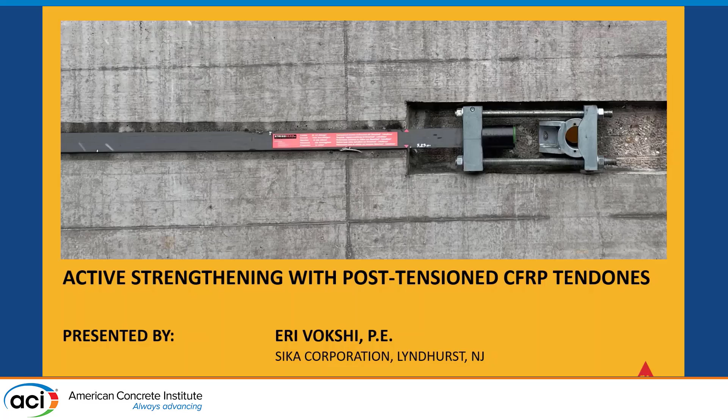My background is in structural engineering. I have a master's degree from Arizona State University, where my master's focus was actually in body armor—a little bit different, but still composites.

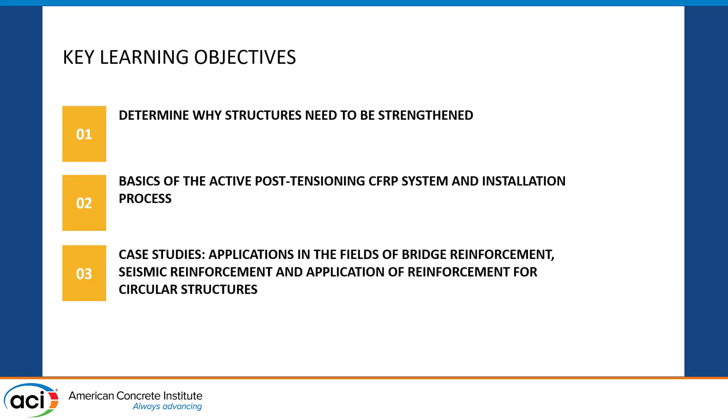So today my presentation is not so much research-driven, it's more on the application side of what we're doing with these different systems in the industry. It ties in though with the discussion of extreme events, as a lot of these applications have to do with those. So I'll build my story on why we strengthen structures, then talk about how this active post-tensioning system works, and show some good case studies with the product.

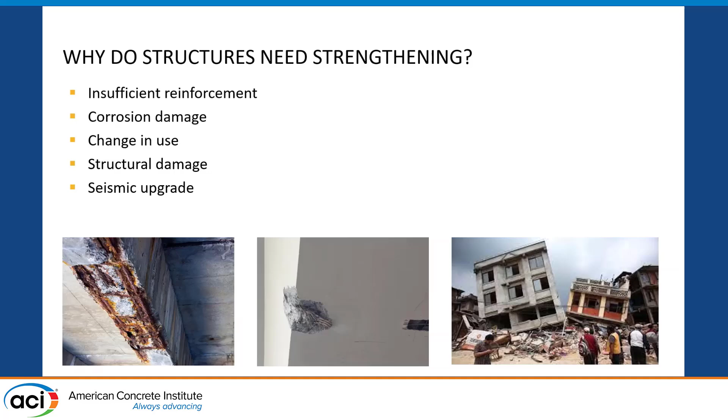So why do we strengthen structures? I think we can all agree that structures are strengthened because there's some sort of structural deficiency that somebody—an engineer—has determined. This can come due to corrosion damage, it could be because of a change in use, it could be due to structural damage like an impact on a bridge, or even, of course, seismic deficiency and the requirement for seismic upgrades.

So when an engineer is considering strengthening in general, they have a couple of options. Externally bonded FRP or steel is one of the options that, obviously, we all participate in this market and love. I'd say what used to be done with steel, more than 70 to 80% of it can be done with just externally bonded FRP, though obviously there are a lot of limitations many of us are aware of. Of course, if that doesn't work, there's always section enlargement—adding additional weight and rebar to the structure—but that's still a well-used method.

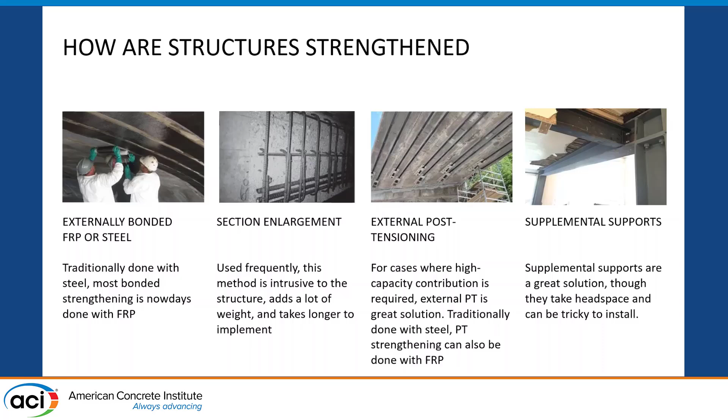External post-tensioning is another method for strengthening, and this is what I'm focusing on today. Most of it traditionally is done with steel, I'd say even today, but I'm going to talk about this new solution—how we can implement it with FRP. And then, of course, if none of these work, there's always the addition of supplemental supports like adding beams or columns.

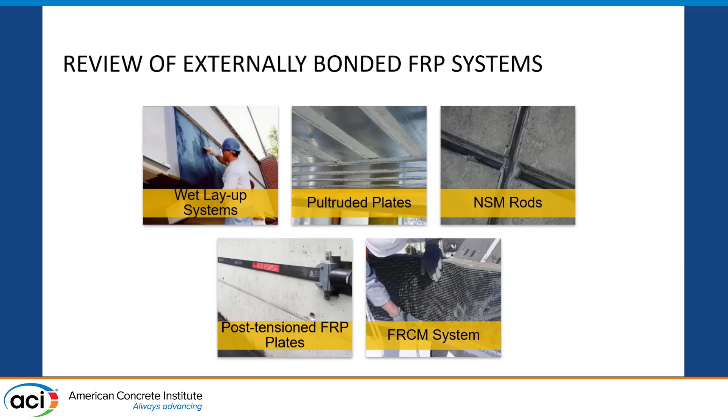Again, to build my story, there are various types of solutions in the market: wet layup systems, or what we call externally bonded systems; pultruded carbon fiber, which is still considered externally bonded FRP—these are pre-cured laminates that come in various widths and thicknesses. Other systems include near-surface mounted rods, which are carbon fiber rods usually installed on top slab applications. And then post-tensioned FRP plates, which is my focus today. We've also seen a couple of presentations here on the FRCM system, which is carbon fiber embedded in cementitious material.

So why post-tensioning with carbon fiber? I think the best way to summarize it, to describe it in basic terms: when we're installing externally bonded FRP, that's a passive system—it sits in the structure until an additional load is applied, at which point the carbon fiber is engaged. Whereas with a post-tensioning carbon fiber system, this is now an active strengthening system, meaning the moment you install it, you're alleviating some of the stresses in the structure, but more importantly, you're addressing deflection or serviceability cases.

In addition, one of the limitations we know with externally bonded FRP is that they're all bond-dependent—you can only utilize their strength as much as that bond allows. Beyond that, you cannot utilize the ultimate strength of that carbon fiber.

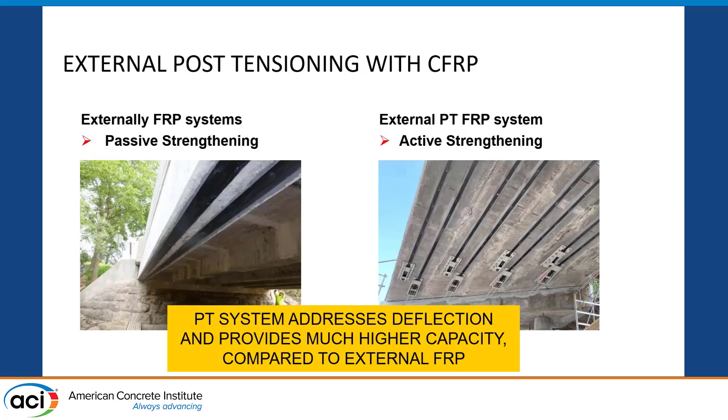Because these systems don't have to be bonded, you're relying on introducing the bond through these anchors that I'll talk about, we can utilize much more of the strength of the carbon fiber. This is a very basic example, not that we would ever design something like this, but to give you a picture of the advantage of this product.

If we were to look at those pre-cured laminates on a beam section, I believe this is a DOT type of beam, and if we were to increase the capacity by about 8%, you would need about 15 CFRP plates going in the bottom. Those are like 3 inches wide, so 15 divided by 3 is 5, so about 5 layers. Again, we would never do that in real life, but this is just to build my story. Whereas if we're utilizing this post-tensioning system, you can get about 26% capacity increase with just 3 of these post-tensioned carbon fiber plates.

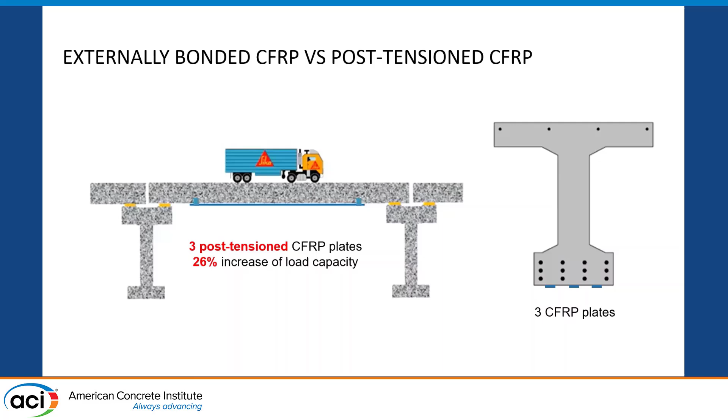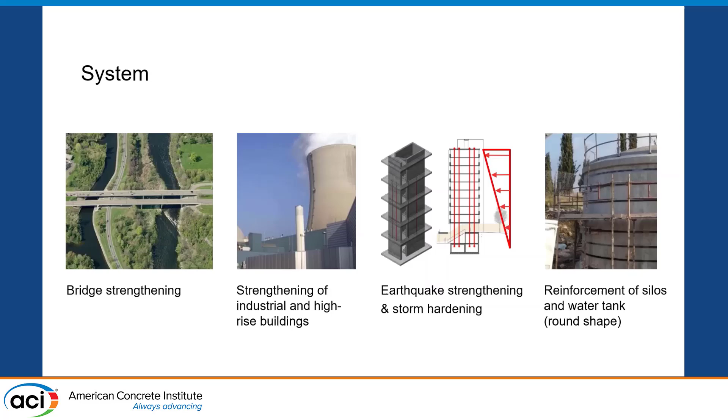So let's look at how this product or how these systems work. The post-tensioning is utilized for bridge strengthening, industrial and high-rise buildings, a lot of seismic retrofit as I mentioned, and we even have some applications in water tanks or silos, which are really big diameter members where you can actually curve the carbon fiber.

So the way the system works is very similar to your traditional steel externally bonded PT systems. You have a fixed anchored end and a movable end. What I'm showing here is one of the anchoring methods. We call this the shear pin method of anchoring, where we're drilling into the existing concrete about 8 inches or so, depending on the f'c of the concrete, on both sides. And then on one side, we have the movable end.

The way the product works is you have the carbon fiber plate that's actually held together via what we call the stress head, which is a mechanically engaged system where the plate is pinched into that head, which is circular. And then these steel plates on both sides here hold the plate against the head.

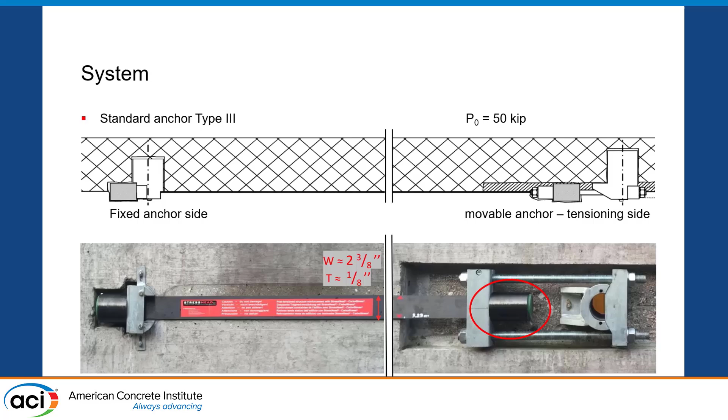And then for the post-tensioning, I think this shows it here, we're introducing a hydraulic jack in the back there, having these 2 threaded rods in the end. And then by pulling it, you're post-tensioning the structure. Once done, you simply tighten those bolts, and you can cut them if necessary or whatever. There's different methods to finish it off, but that's how the post-tensioning works.

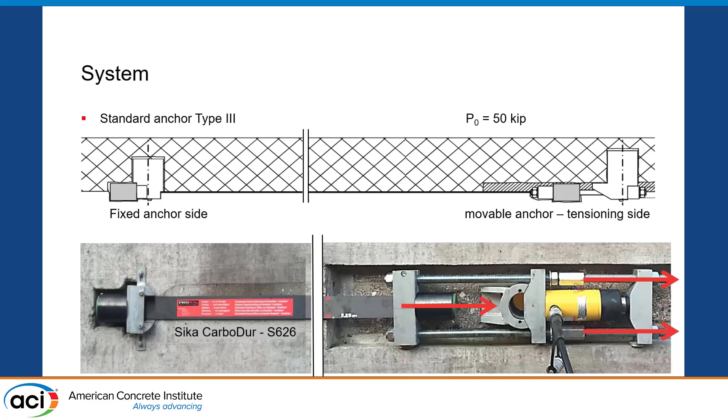We're introducing about 50 kips maximum of post-tensioning load to these plates. I will mention that this is about 50% of the ultimate capacity. But a lot of times, depending on the geometry and what the application is, we're looking anywhere between 30 kips to 50 kips of post-tensioning load per plate.

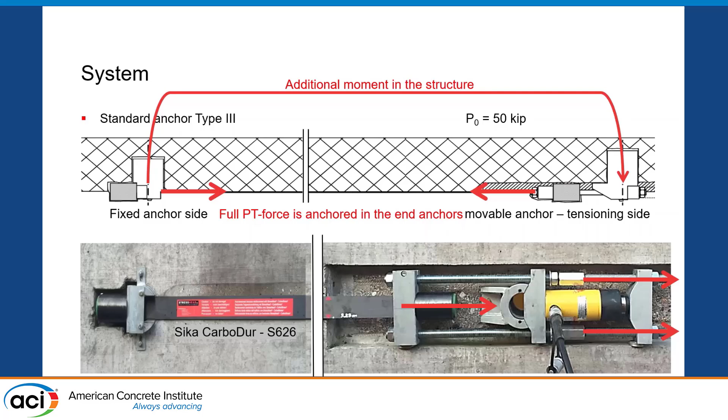Now these plates can be placed next to each other, or in some cases we've even done a case where you can actually place them on top of each other. So there's different ways where you can get more than 50 kips capacity.

I talked about this shear pin. I think this is a bit more detail of how that's applied. Again, I mentioned it's about 8-inch depth of drilling into the concrete that you'd have to do for a 3,000 PSI concrete.

This is one of the standard anchors that we have, tested for and readily available, with drawings and all that for users.

Whereas you'll see, you can get pretty creative on how you introduce the PT load, because obviously one of the limitations of this particular anchor that I'm showing here is not always do you have 8 inches. Actually, in most cases, you never have 8 inches that you can drill through to introduce this load.

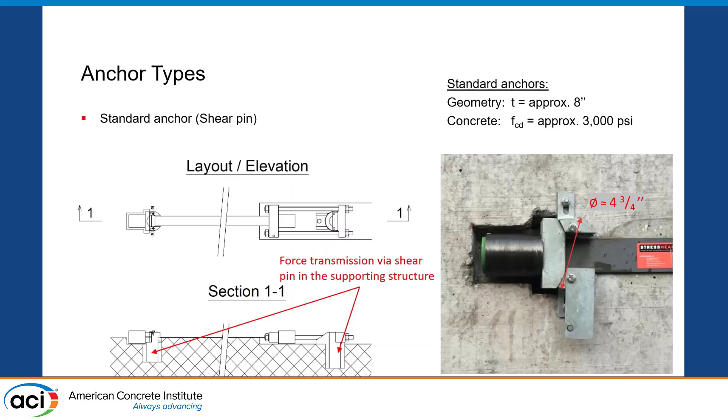Another anchoring method, also standard, is the one we use for masonry walls, where we're sitting the anchor at the top of a slab, let's say on a high-rise building, as well as at the bottom of the slab to anchor that system, mainly again for seismic retrofit.

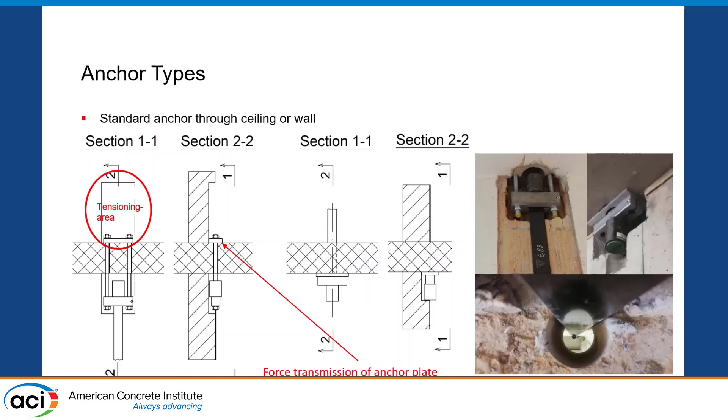As I mentioned, there are those two systems that are standard, but you can get creative in terms of the engineering side on how we do that, to make sure that you're not cracking the concrete and not causing any damage around the area where the PT load is being introduced. These are different examples of anchors that have been modified from the standard to make sure the PT load introduced is okay for the structure itself.

I like this one. This product, by the way, originated in Switzerland—they have a lot of applications there. It's been around for over 20 years now, and I like how they call it the Swiss lock on this one.

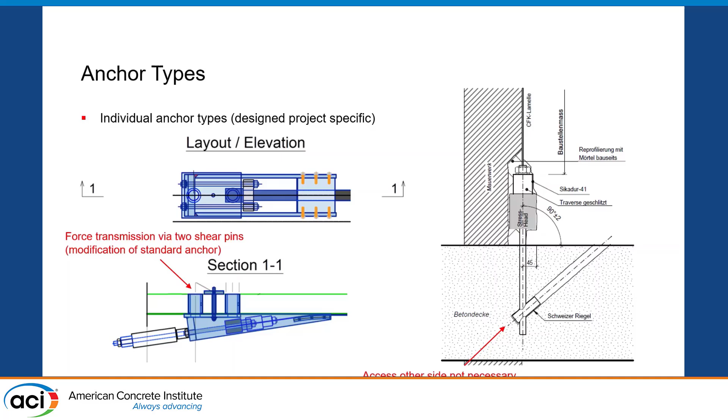On the installation side, this is one of the big advantages, similar to the FRP systems—it's very quick to install and very lightweight. I'll show some case studies where you're installing in active conditions without much mobilization required.

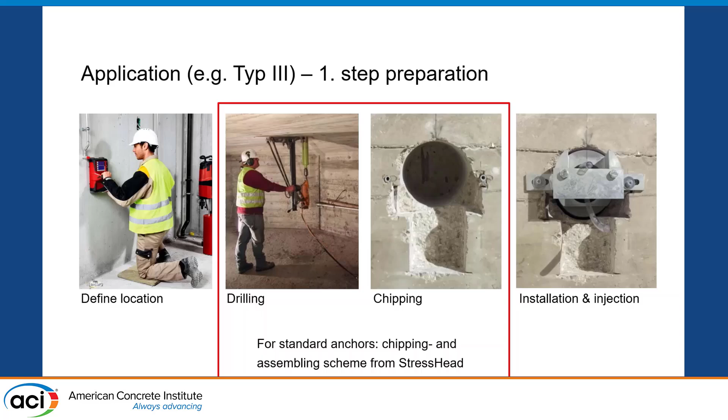In general, you define the area and drill through where you're installing those anchors, both the fixed end and the movable end, chipping if required, installing the anchor itself, and injecting or installing the anchor bolts prior to the FRP installation.

I mentioned before the product can be installed unbonded. We do recommend that when installed, you bond it, just for protection more so than anything. If you want the additional stiffness you get from bonding it, you can, but really this is completely optional.

Another reason we like doing the epoxy is because it acts as a lubricant when you're post-tensioning it, especially if installing it flush to the surface. If you don't have something in between to lubricate it as you're post-tensioning, you may damage a bit of the carbon fiber strands at the very surface.

We get this question a lot: can you let the epoxy set and then post-tension it? No, you can't, because you'd introduce a ridiculous amount of strain on that bond line. So if an owner decides to install this as a bonded system, you have to install it while that epoxy is still wet.

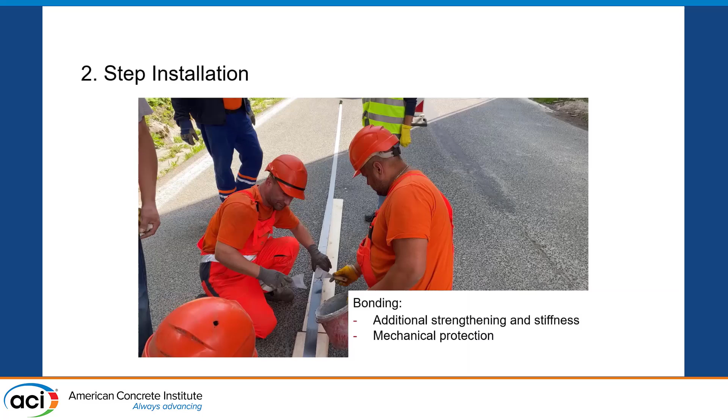This is just showing a video of the installation. Now I'll talk about this case study—this is in Slovakia, on a bridge.

You can see here how we utilized a lot of anchor bolts because we didn't have much cover to install that shear pin I was talking about earlier. On this job, they had to be in and out very quickly because it was a major artery to a scenic view.

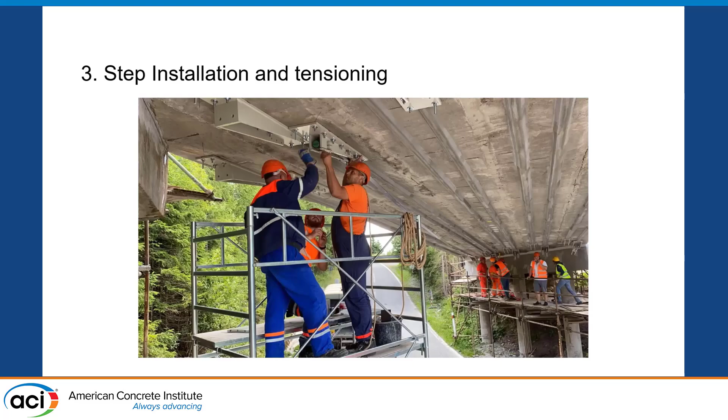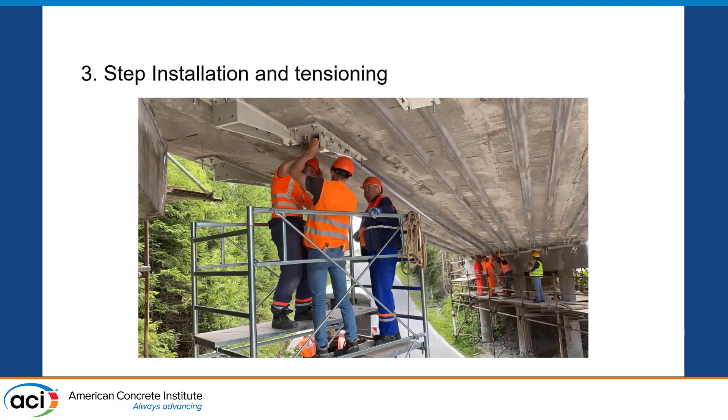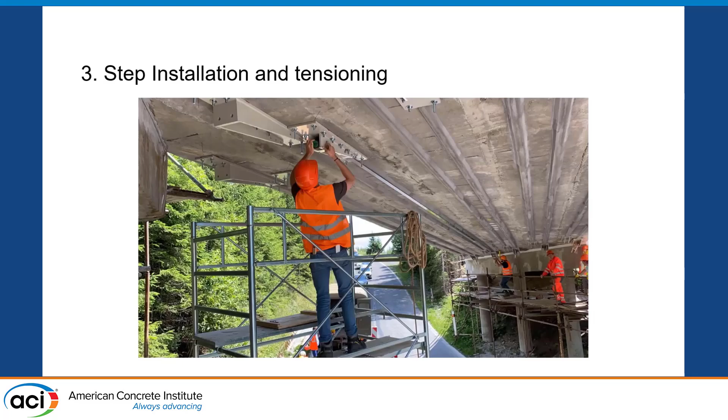There's a video showing how they're installing the fixed end on this side, making sure all the anchor bolts are correctly drilled in, and taking measurements to ensure everything is per the drawings. On that side, they pulled it, and now they're post-tensioning it. At this point, traffic is not allowed to move, but as soon as it's done and bolted, traffic is back to moving. This took about 20 minutes just for the plate installation, making sure everything went smoothly.

And then the other end of the anchor—this is the same job with the hydraulic jack. You can see how they're pulling the plate and how the deflection is happening.

So one of the questions we get is how do you make sure you're achieving the PT load? It's all deflection based. These are linear elastic models, so it's easy to tell approximately how much the PT load is.

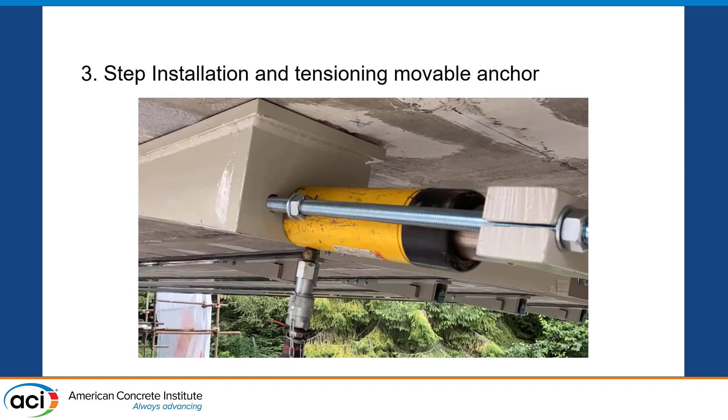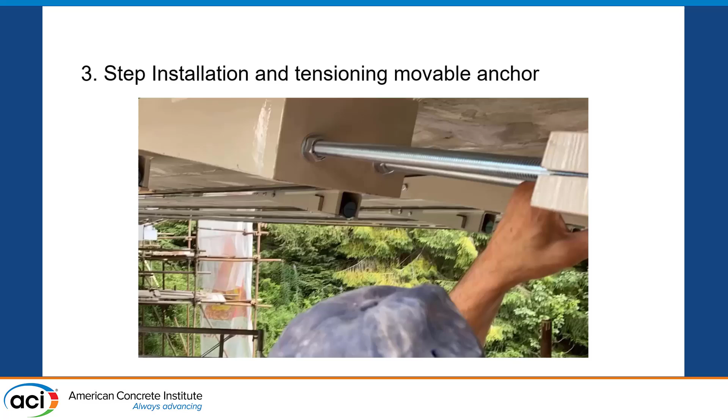Another question we get, though probably not as applicable for this group, is how much can you pull it? It all depends on the length of the plate—if it's a short plate, you'll pull it very little; if it's a long plate, you'll get more deflection out of it. In the end, you bolt it, let it go, and that's it.

Fire, right? Mark just did a great job talking about it, and I'm pretty passionate about this topic as well. These products have similar limitations to externally bonded products—you can apply a cover to potentially protect the rest of the structure, but in a fire event, these would still be sacrificial, unfortunately.

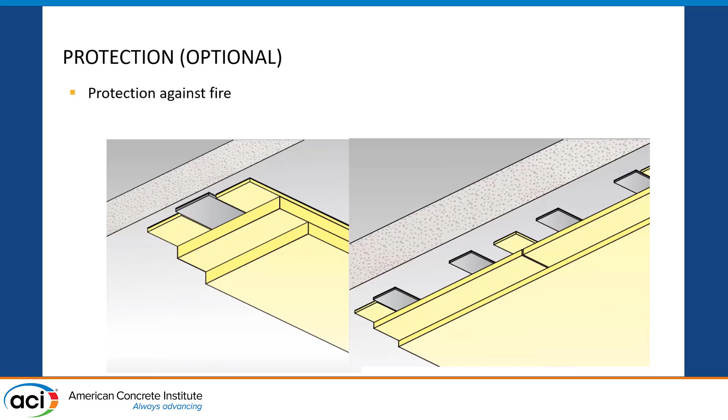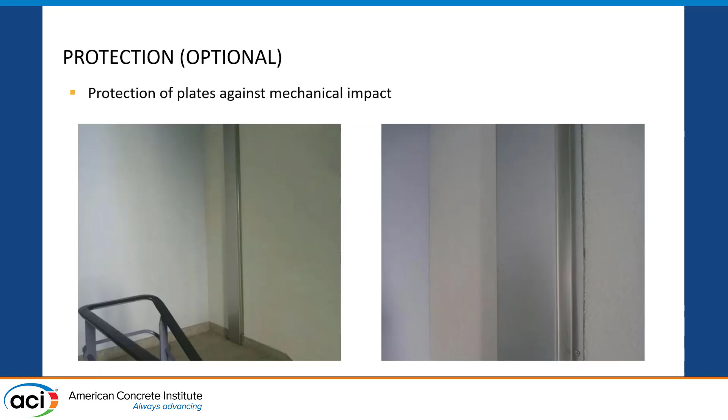In building applications, a lot of it has been installed for seismic retrofit, since the chance of both fire and seismic happening at the same time is limited - this is where the majority of applications are. In this particular structure, the FRP was installed along the height of the building, and you can protect it from the outside world by putting an aluminum casing over it so nobody touches or tampers with it.

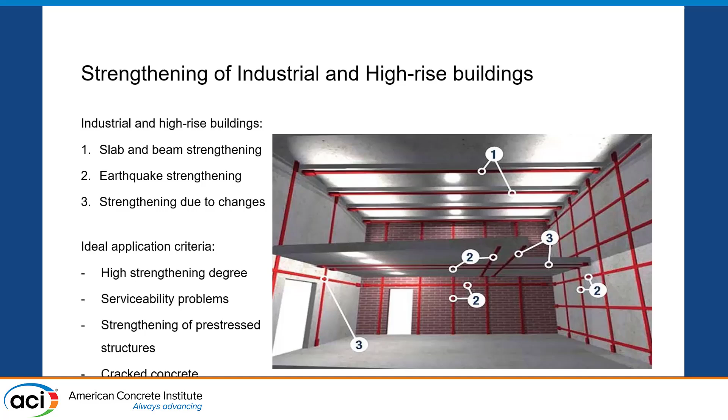A few case studies. In buildings, you can utilize it for slab and beam strengthening, seismic retrofit, and strengthening due to changes - I'll talk about a case like removing columns in an area. Anytime you have a serviceability problem, PT members are also a good application, as is cracked concrete, which I'll cover in a water tank case study.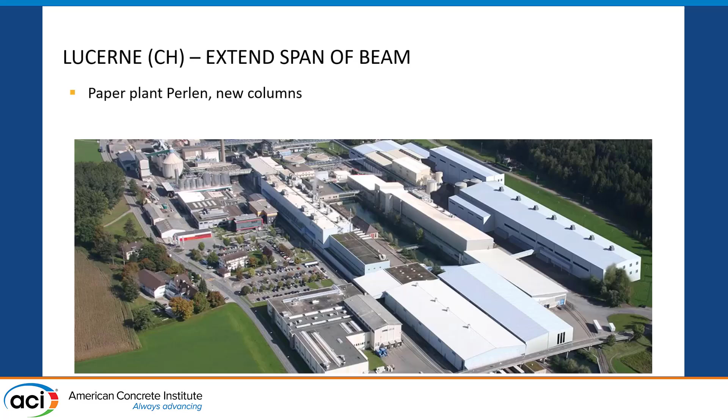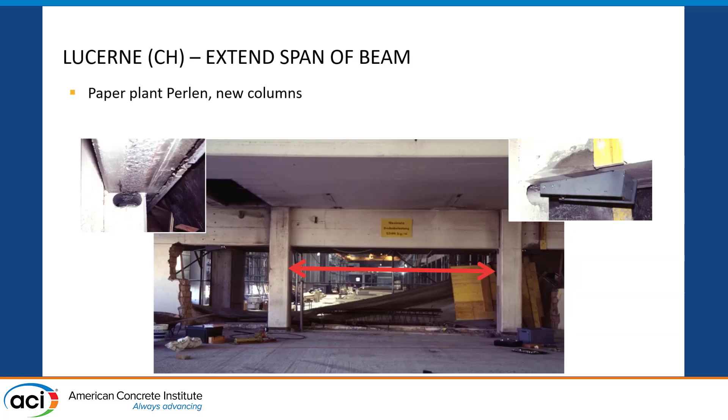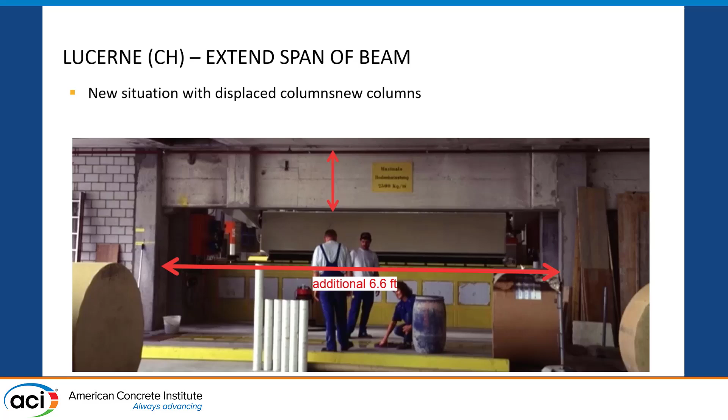This first example is a Swiss project - many of these are international projects, FYI. There was a paper plant installing new machinery to carry paper in and out of a section. You can see a very deep beam with columns in between at a certain distance that needed to be wider. So they installed the PT strand, or PT system, inside the column, then cut off the columns and rebuilt them on the side, allowing the machinery to move in and out of the area.

Here's an example for change of use or serviceability. This was a casino in Vienna where they were making changes to the structure and needed to remove two columns that were in the way. The engineer determined there would be too much deflection, so they used this system specifically to address deflection, more so than ultimate state.

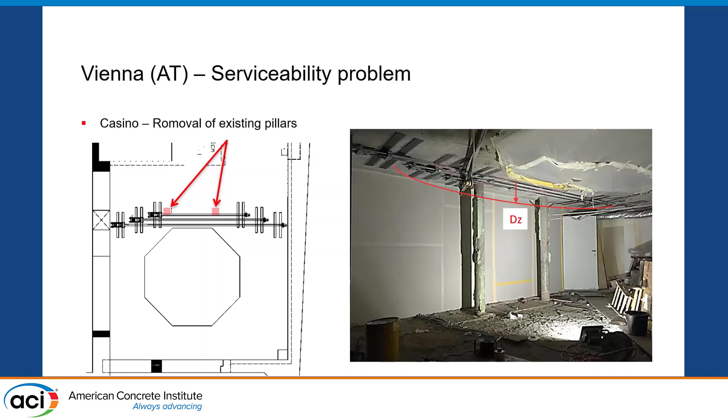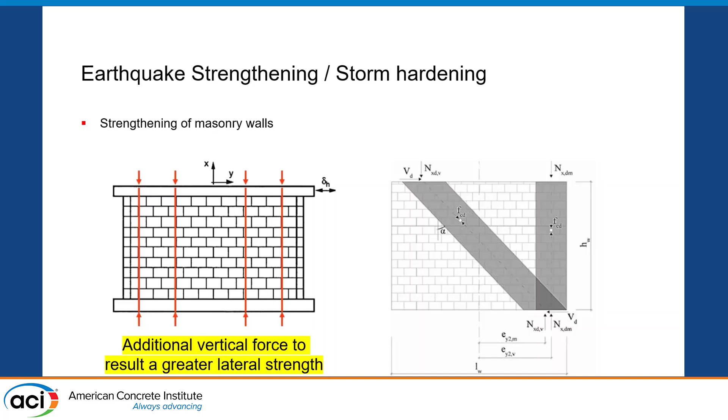This system is very widely used for seismic retrofit, specifically in masonry structures - we have many case studies of that. I'll start with this one: a project in a mall where a new building was joining an existing one. At the join, they determined that for seismic reasons they had to close or stiffen that joint, so they utilized the PT system to stiffen that area for seismic purposes.

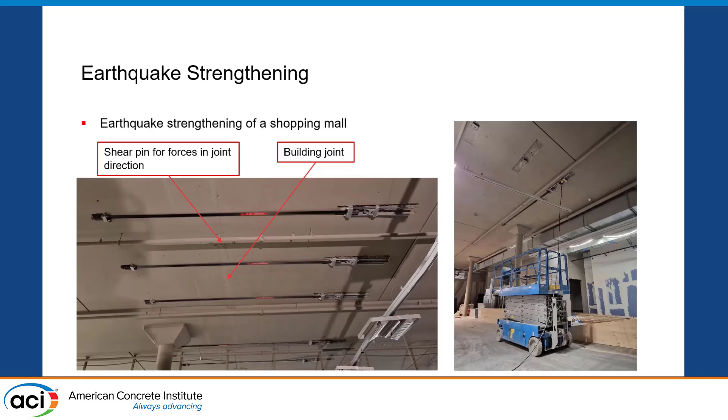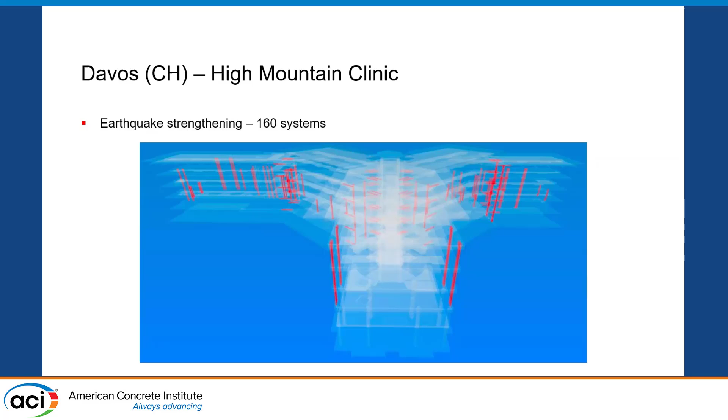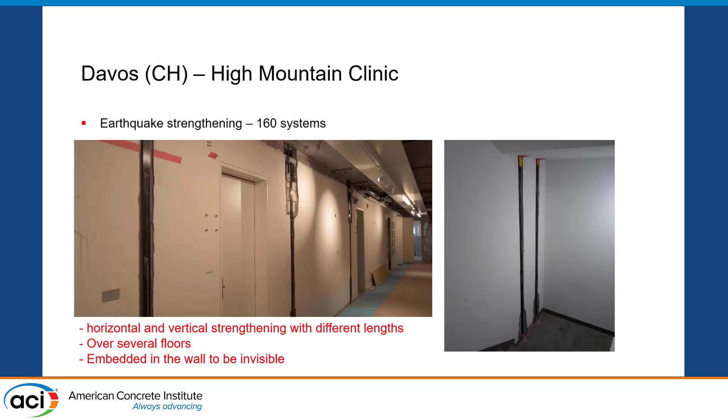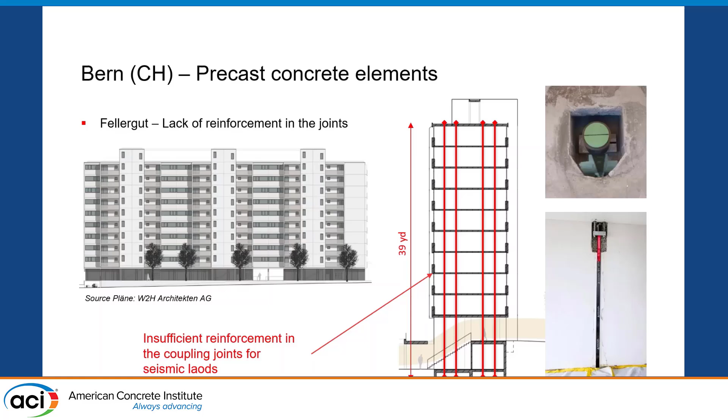This was a building where they installed, again, a high-rise structure. For seismic retrofit, some of these joints were determined to not be sufficient, so they installed it along the entire height of the structure, making sure that the coupling joints are able to take some of the seismic loads.

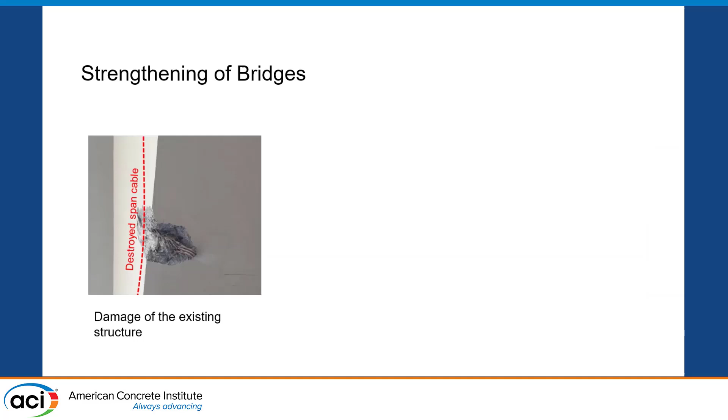Many of the applications for this product are also in bridge applications. A lot of it is for damage, impact, so good emergency or emergency case applications. We've done some cases for higher loads, and I'll show a really good case study.

We've done a case in Mexico where they literally needed something to carry a big load that the bridge could not take, for one load only, and that was it. It was a new boiler. They paid for it to be strengthened, and this was a quick and fast way of applying that high load demand that was required.

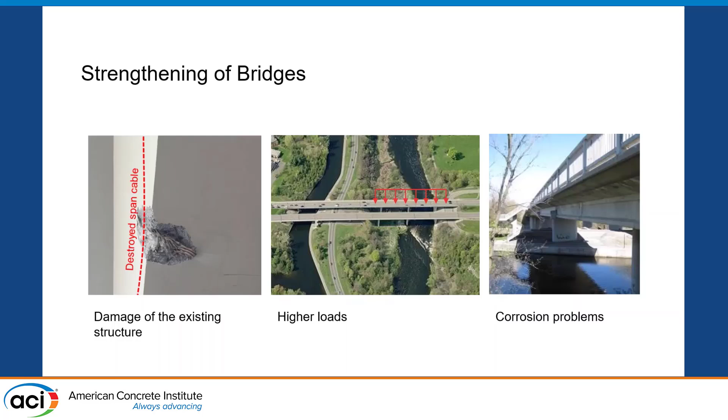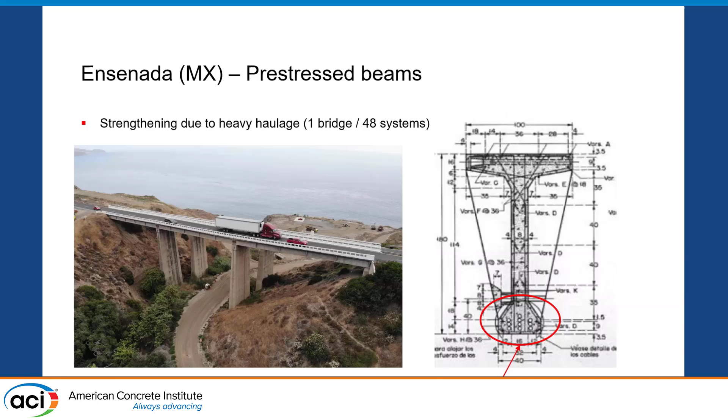The way we did this, we utilized 48 systems for all the beams included here. We basically drilled a shear pin through the member up there to carry the load, with four systems per beam member, post-tensioned. Here's some dimensions - 65 feet up in the air.

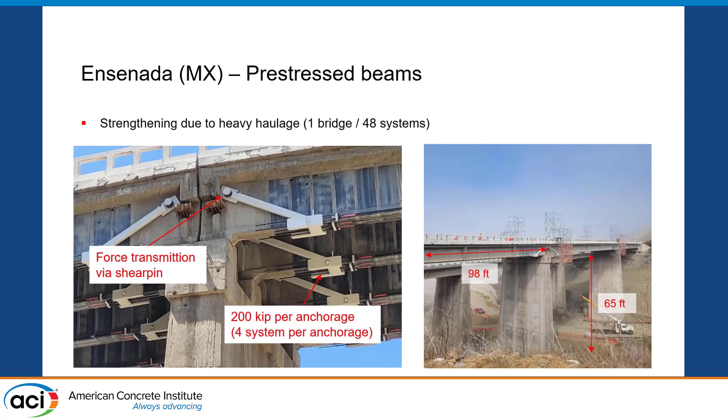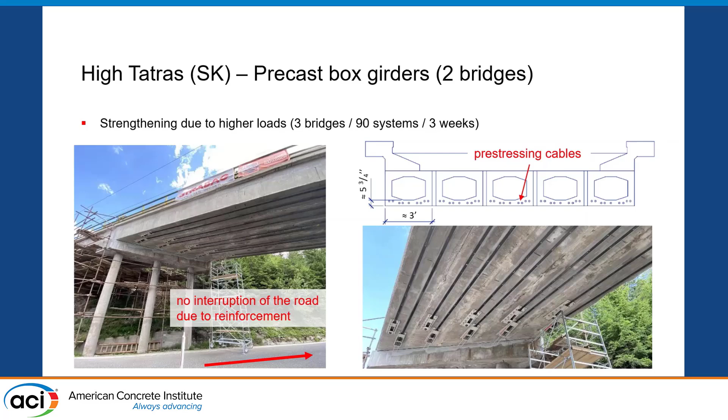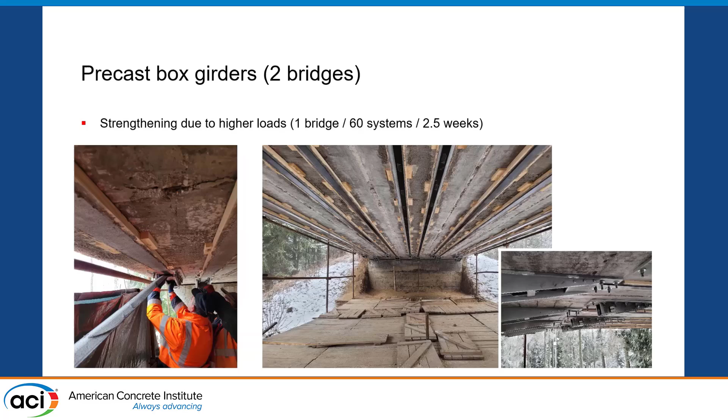The other interesting thing is, because they couldn't drill into the slab itself, in order to make the FRP flush to the substrate, they actually had to build up about 2 inches of what they call a little bridge, so that the plate goes flush onto the structure.

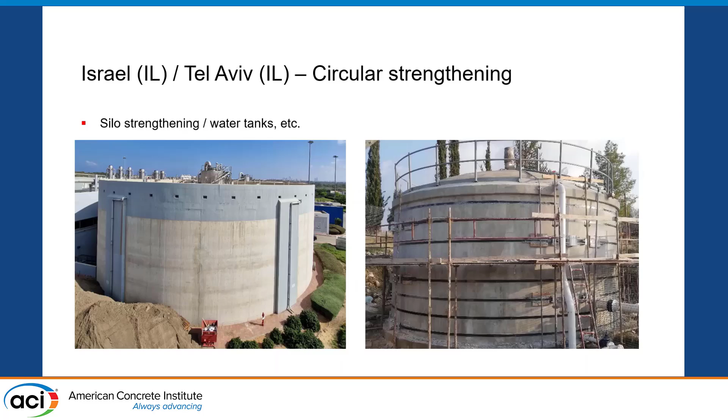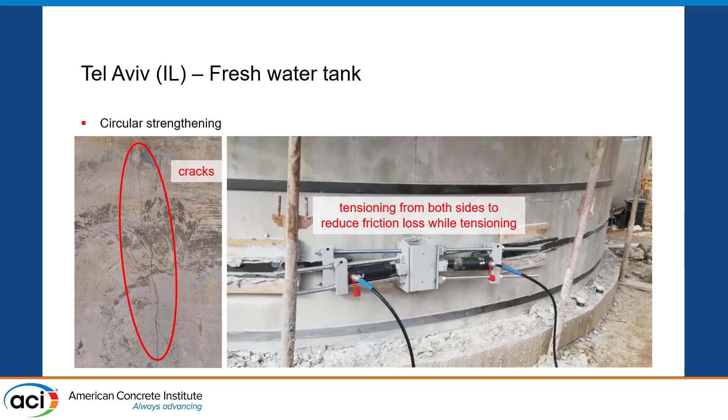This is an example of the water tank I was referring to earlier, where there was a lot of cracks on the existing structure. After injecting and doing the proper repairs, they utilized the PT system to hold it all together and make sure those cracks don't open further. The post-tensioning was done on both sides, as shown here.

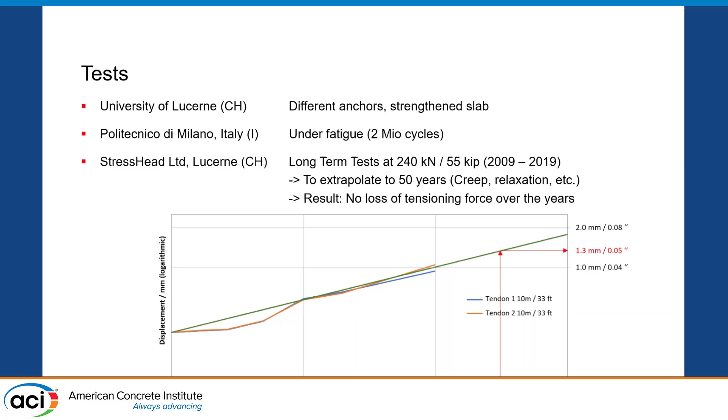I want to mention this because some of you will be interested. One of the things about these products is that they have very little to no relaxation. They've done lots of fatigue testing, as well as testing for the past 10 years where they post-tension it to higher loads than what we designed for, and again there's barely any losses overall on the tendon itself. That's one of the advantages we highlight compared to steel applications. We do have documentation as well if anybody's interested, that we can share with regards to the design.

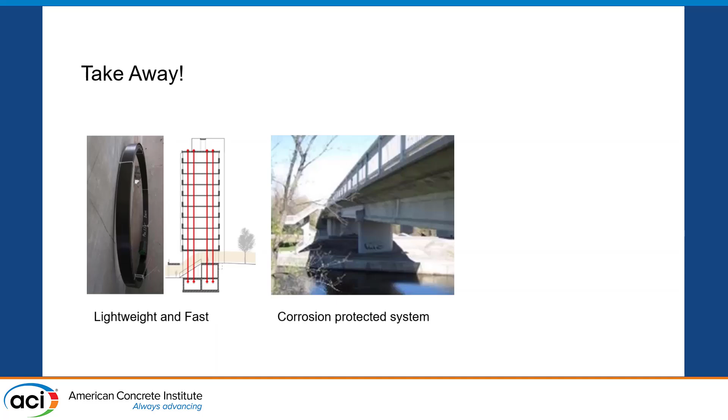My goal today is that the main takeaways are that these products are very lightweight and fast to install. Obviously one of their big advantages is that they're not corrosive, and hence can be a very good application for cases where you have a lot of corrosion. We have a lot of experience designing with some of these systems, and even though the anchoring side can be complex sometimes, there are many examples that can be provided to help determine the best way to introduce these loads.

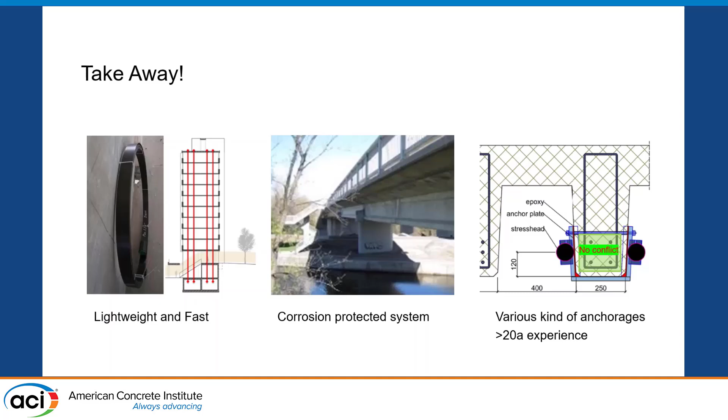I'm sure you'll have questions. Oh yes, I always get excited. All right, please, yes please.

In 2000, after 10 years of research work, we designed and constructed a 3-span bridge with external post-tensioning draped cables. The cable is about 14 millimeters in diameter, and each cable is stressed to 150,000 pound force, 600,000 pound force per beam, externally draped. That's high, a large amount of force.

The challenge, and still a challenge, is the anchoring system and the creep. We've been monitoring this under a contract with FHWA since 2000 until 2025. So my question to you, you did a great job. I have to tell you that based on all the work we've done, how would you monitor a bridge anchoring system?

That's what concerned me, the anchoring system. Thank you. It's funny, in Europe they can be black and white, which is great. Sometimes for the purpose of being straightforward it's great, but in some cases like this one, every time I hear my counterparts in Europe say there is no creep, there is zero creep, I'm like, oh, I don't know, it makes me very uncomfortable.

To be honest, I don't know if we have any monitoring on the anchor side itself, and I appreciate you bringing that up. The good news is these loads are much lower, but I don't think that should change the fact that it should be monitored and looked at.